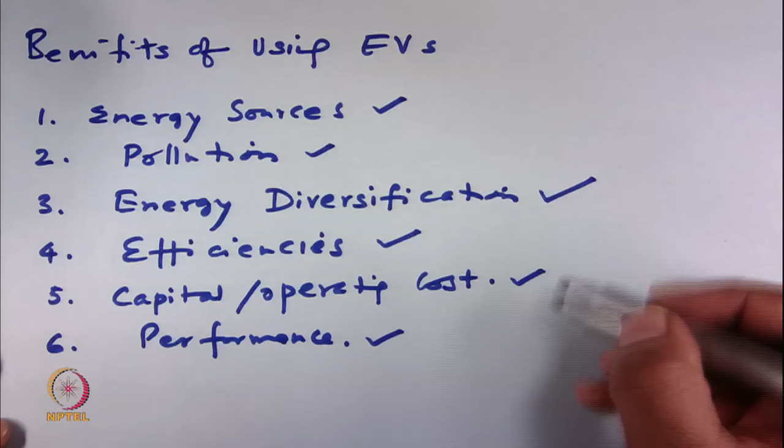So, to better understand the advantages and shortcomings of EV, let us compare the EVs with other modes of transport. The comparison can be done on the following parameters: energy sources, pollution, energy diversification, efficiencies, capital and operating cost, and performance.

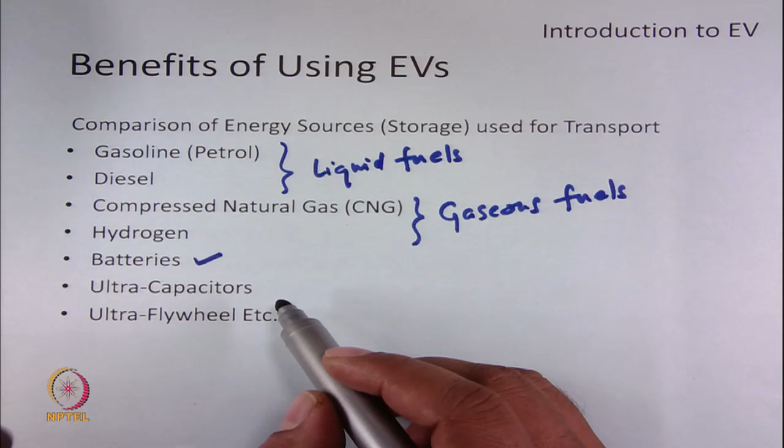Now, let us compare the different types of energy sources used in different types of vehicles. We all know gasoline, which is petrol, diesel, compressed natural gas, which is CNG, hydrogen, batteries, and the upcoming ultra capacitors and ultra flywheels. So petrol and diesel are liquid fuels, while CNG and hydrogen are gaseous fuels.

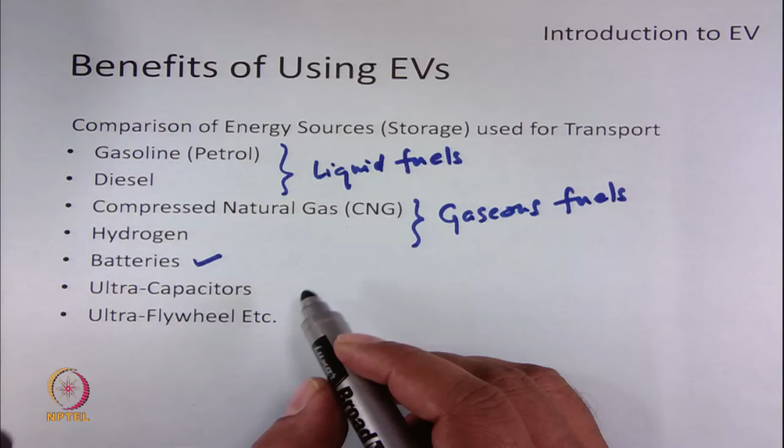Battery stores the energy in chemical form and provides energy in electrical form. Ultra capacitors store the energy in electrostatic form, while ultra flywheel stores the energy in mechanical form.

Both petrol and diesel have similar energy content per unit mass, which means they have the same specific energy. But since diesel is denser compared to petrol, it has higher energy content per unit volume. The energy per unit volume is also known as energy density. By having higher energy density, diesel is more fuel economical compared to petrol.

CNG has higher specific energy compared to liquid fuels, but it has very low energy density. On the other hand, hydrogen requires storage at a very high compressed state using high pressure, and therefore requires a lot of ancillaries around its fuel tank. But on the positive side, it has very high specific energy compared to petrol, diesel and CNG. Therefore, there is a serious effort to make hydrogen based fuel cell electric vehicles a commercial viability.

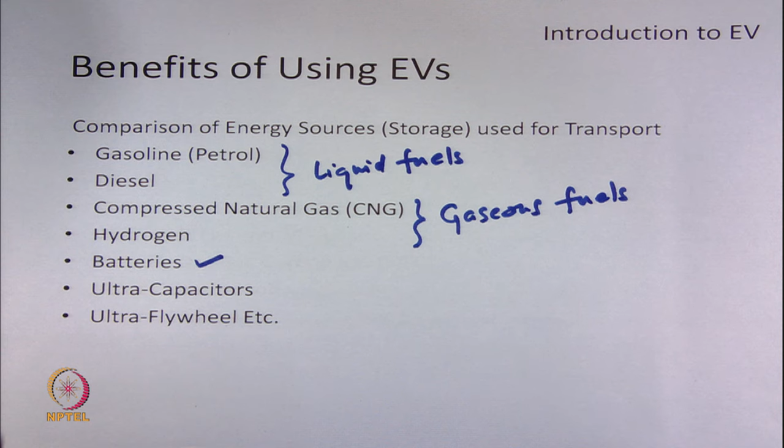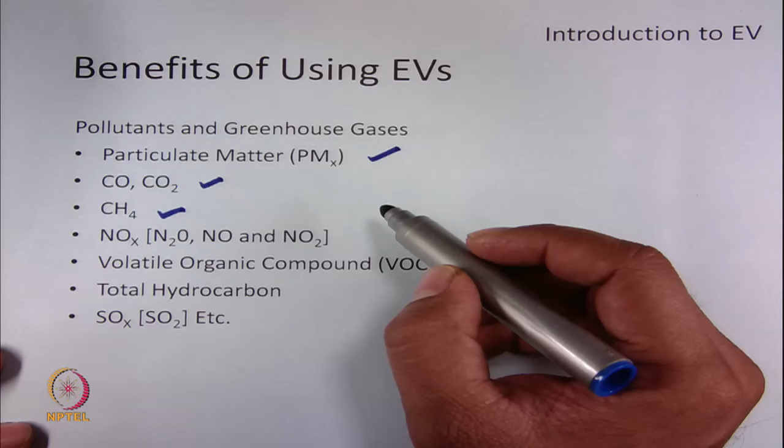There are various types of pollutants and greenhouse gases released as emissions from vehicles, and they are the reasons for smoke and air pollution. So some of them are particulate matter, known as PMx, carbon monoxide and carbon dioxide, CH4 which is methane, NOx gases which is N2O, NO and NO2, VOC which is volatile organic compounds, total hydrocarbons, and SOx gases which is sulfur dioxide.

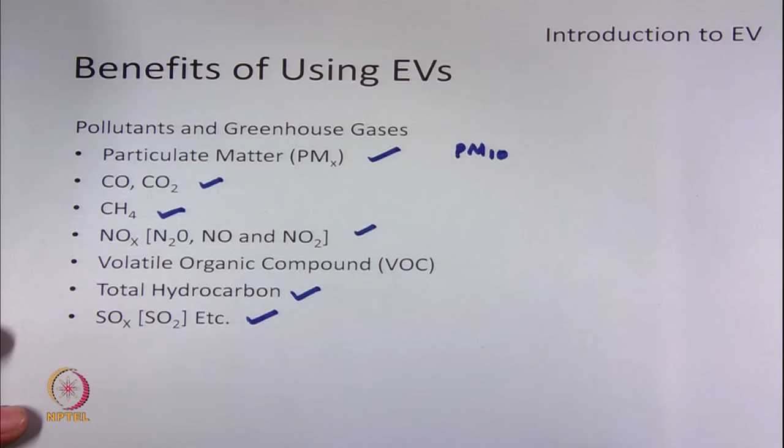Particulate matter are particles released as a part of the combustion cycle. These particles are extremely small, in the range of micrometers. Therefore, they cannot be filtered by human throat and nose, and so they enter the body and affect the heart, lungs and brain. These particulate matters are cancerous in nature and one of the major reasons for causing cancer due to air pollution. Diesel engines release more PM compared to petrol. PM particles less than 10 micrometers, which is PM10, are very dangerous and if inhaled can cause severe damage.

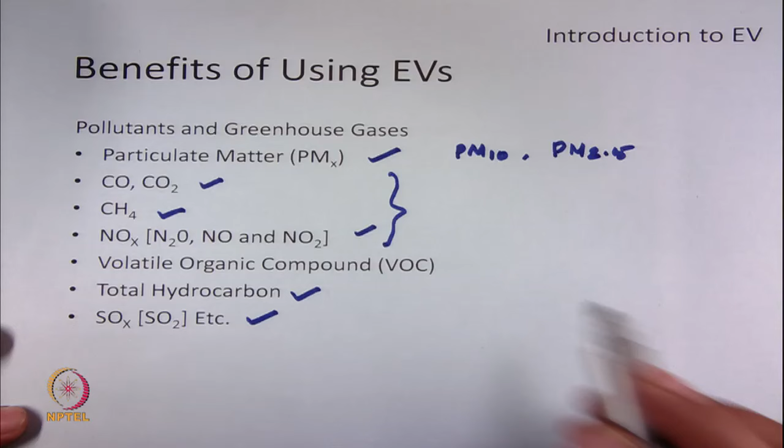So these are clubbed and referred as PM 2.5. These three gases are known as greenhouse gases. Due to the presence of these gases, infrared radiations are trapped in the atmosphere and cause greenhouse effect such as climate change and global warming.

Carbon monoxide is a colorless, odorless gas which is very dangerous for human health. It is highly poisonous. Large amounts of CO2 are released by IC engine based vehicles, which adds to the already present CO2 in the atmosphere and thus contributes to greenhouse effect.

NOx gases, VOC and total hydrocarbons are responsible for building ground level ozone layer. This ozone layer, if present at the ground level, is very dangerous for humans. It can create lining in the lungs.

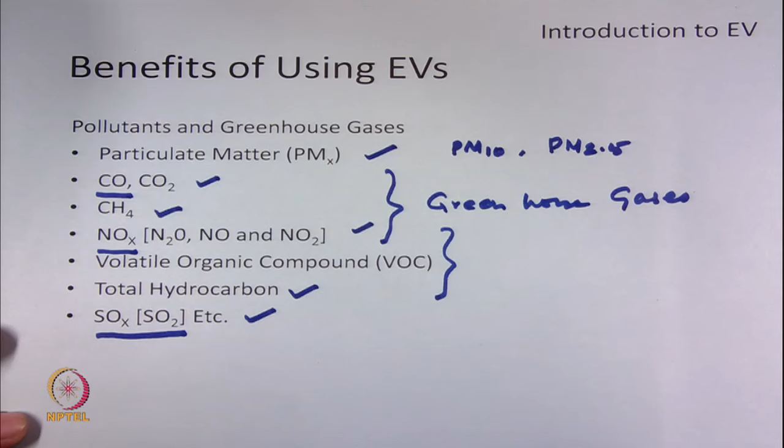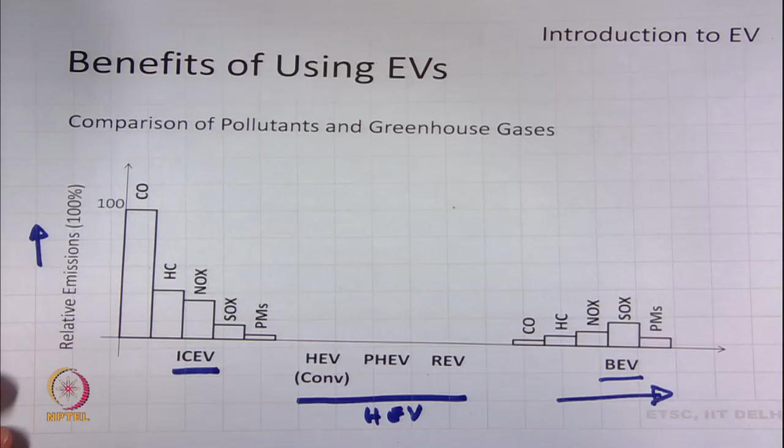So the global countries are pushing for hard regulations. We all know about Euro regulations in Europe and Bharat Stage regulation in India, which is enabling vehicle manufacturers to do research such that the emission of these pollutants can be minimized.

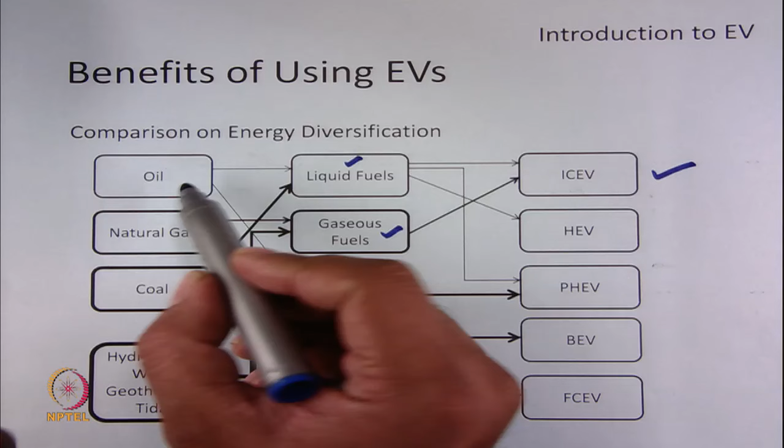So it is interesting to compare energy diversification of different types of vehicles. IC engine vehicles typically use liquid fuels and gaseous fuels, which are coming from either oil or natural gas, while pure electric vehicles such as battery electric vehicle and fuel cell electric vehicle use either electricity or hydrogen as energy carriers.

So if we see the types of fuels and the sources which are required to generate these fuels, we can clearly see that electricity can be generated by almost all the energy sources. Therefore, EVs have a definite advantage compared to IC engines, which require oil and natural gas as fuel.

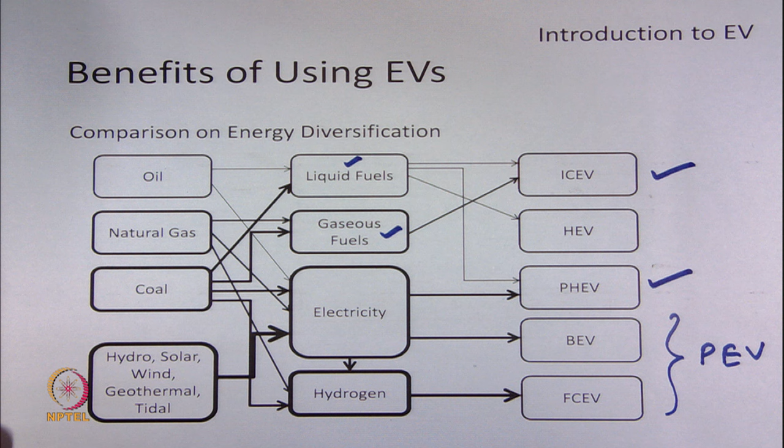So among different types of vehicles, PHEV you can say is most energy diversified, because it can run on both liquid fuels and electricity, and these two fuel sources have an already excellent infrastructure support present now.

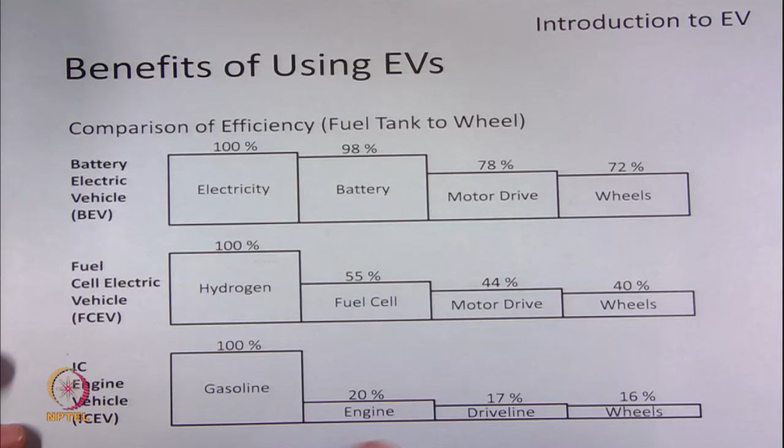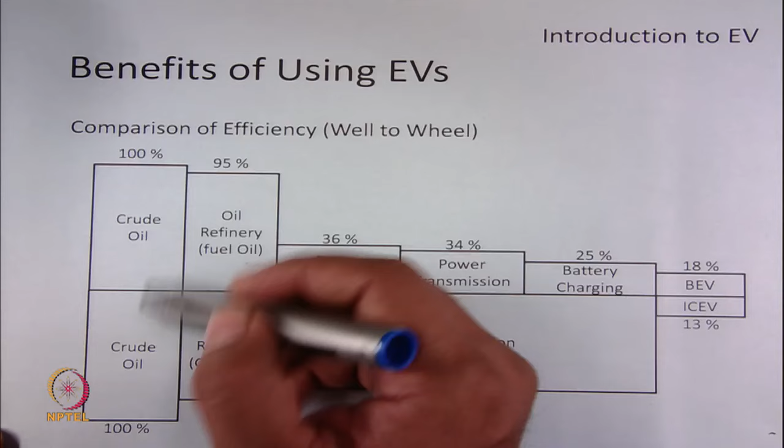A more fair comparison can be done if we start from the source of energy, which is let us say crude oil. So if we start with 100% crude oil for both battery electric vehicle and IC engine vehicle, we can see that the efficiency on the wheels is 18% for battery electric vehicle and 13% for the IC engine based vehicles.

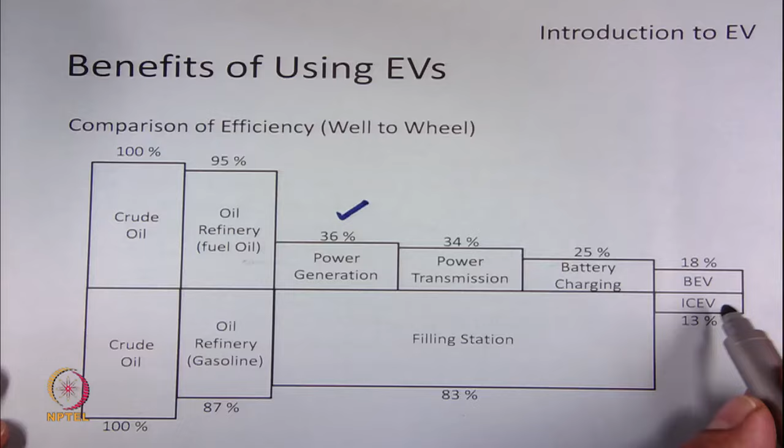The major loss in calculation of battery electric vehicle efficiency happens in power generation. It is only 36% for a typical thermal power plant, while the major loss component in the efficiency of IC engine based vehicle is very inefficient engine efficiency, which is only 20%.

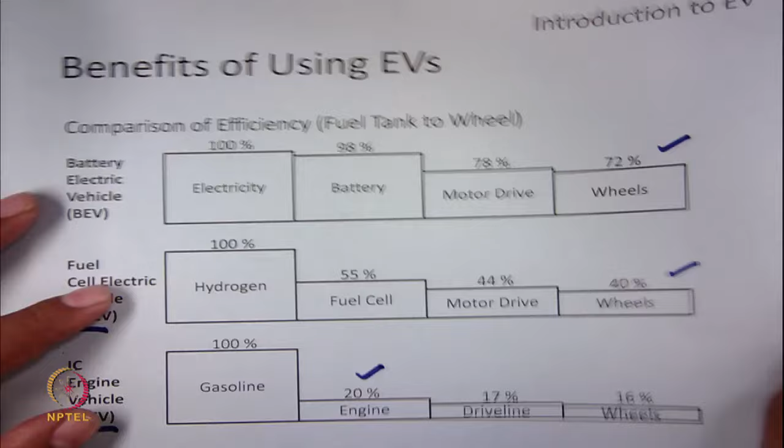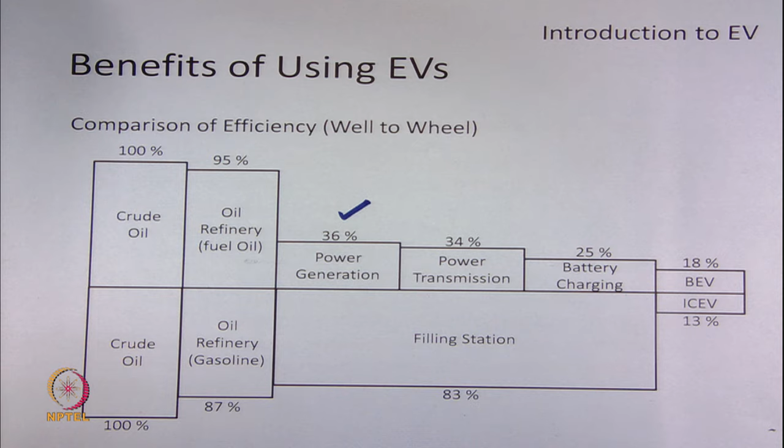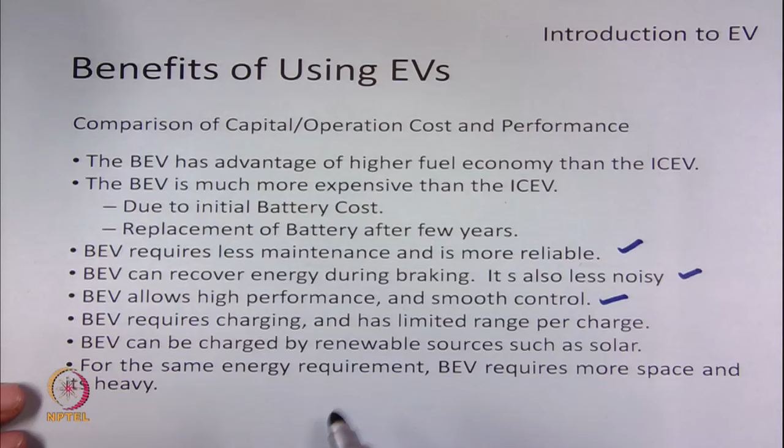On the negative side, BEV requires continuous charging and has a limited range per charge. This is a cause of concern and it causes range anxiety among customers. BEV can be charged using renewable energy sources such as solar. Also, for the same energy requirement, BEV requires more space and is more heavy.

So we will begin our next topic of discussion, which is overview of different types of EVs and their challenges, in the next interaction. Thank you.